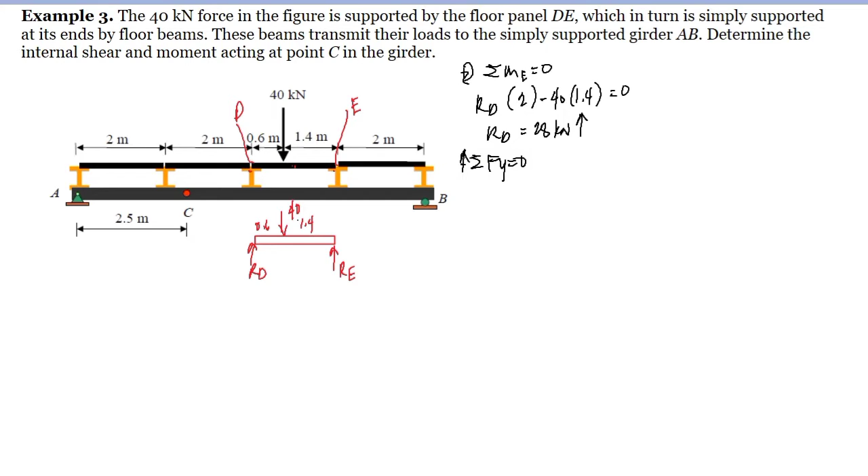Shift, solve, equals, and that would give us 28 kilonewton. So we have here 28 kilonewton. The answer is positive, so tama yung assumption natin that RD is directed upward. Summation of forces vertical is equal to 0, taking the upward direction as positive. So we have here RD plus RE minus 40 is equal to 0.

But we already had computed the value of RD. So that's 28 plus RE minus 40 is equal to 0. So solving for the value of RE, 28 plus RE, so that's X, minus 40 is equal to 0. Shift, solve, equals, and that would give us 12 kilonewton. And it is directed upward since positive lumabas. Tama yung assumption natin.

Okay, so since RD here is equal to 28 kilonewton and RE here is equal to 12 kilonewton, this reaction will be transmitted to the beam. So kung ito yung beam natin, this 28 kilonewton will be transmitted here, and in here sa beam at point E, siya naman yung magre-receive ng 12 kilonewton load from the reaction RE. And of course here, it will be reacted by 28 kilonewton and 12 kilonewton here.

So para dito sa girder natin, review, ano pinagkaiba ng beam sa girder? The girder is also a beam, but if the beam carries other beams, ang tawag na sa kanya is girder. So this 28 kilonewton here will be transmitted here, and that 12 kilonewton will be transmitted here. Now, if we are asked to find the reaction at point C here, and at point A, of course, we have the reactions here since we have a hinge support. So that's AY and AX. Since wala naman tayong horizontal na mga forces, this AX is equal to 0.

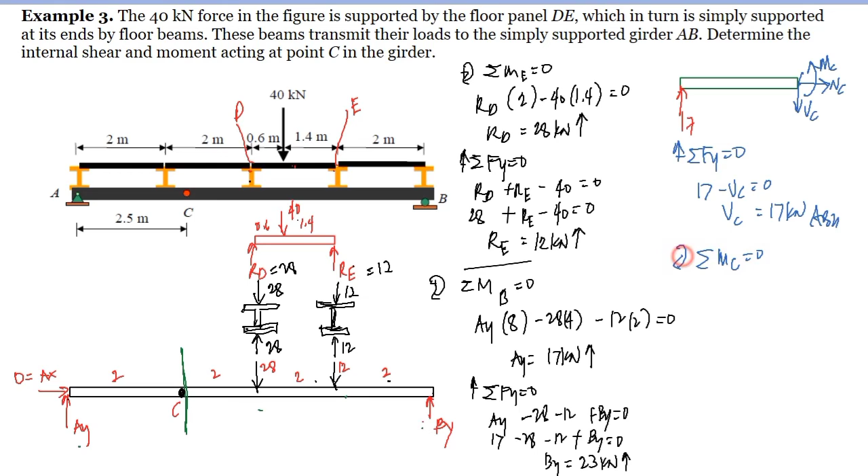Then we have here 17 multiplied with the moment arm. So as you can see here, the C is 2.5 meters from the left support. So it's 2.5 meters here. So meaning this is 2.5 meters. And the moment at C here is counterclockwise. So that is minus MC is equal to 0.

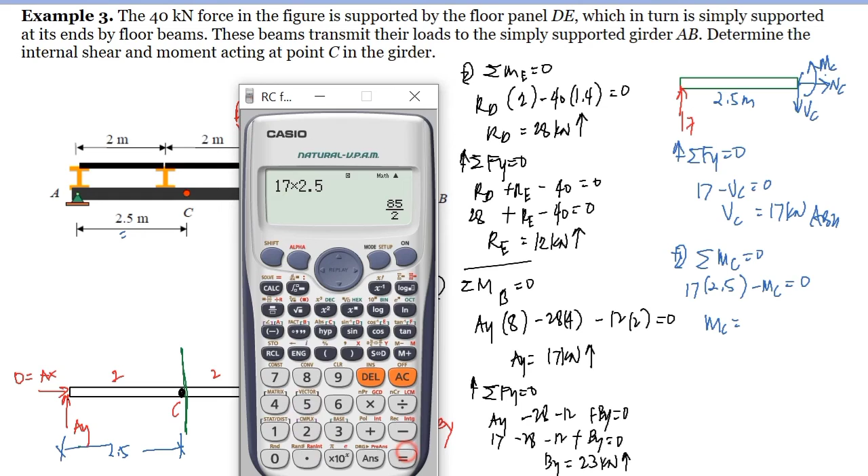Computing for the value of the moment at C, then we have 17 times 2.5. And that is equal to 42.5. So 42.5 kilonewton meter. And this is our answer.

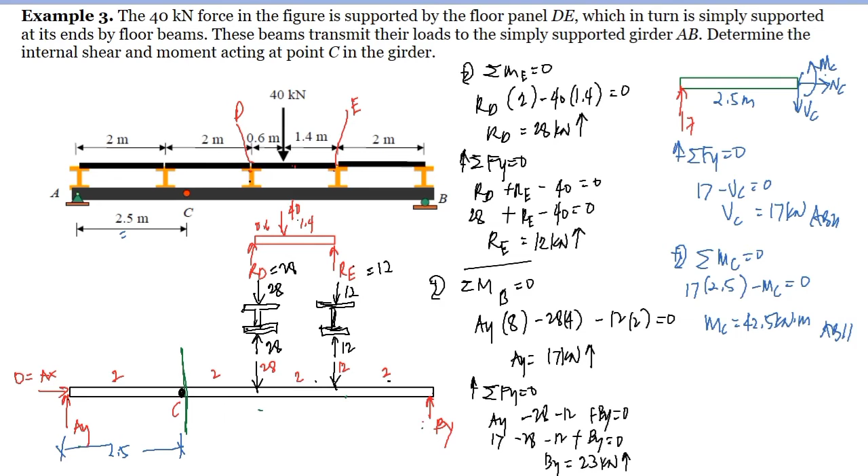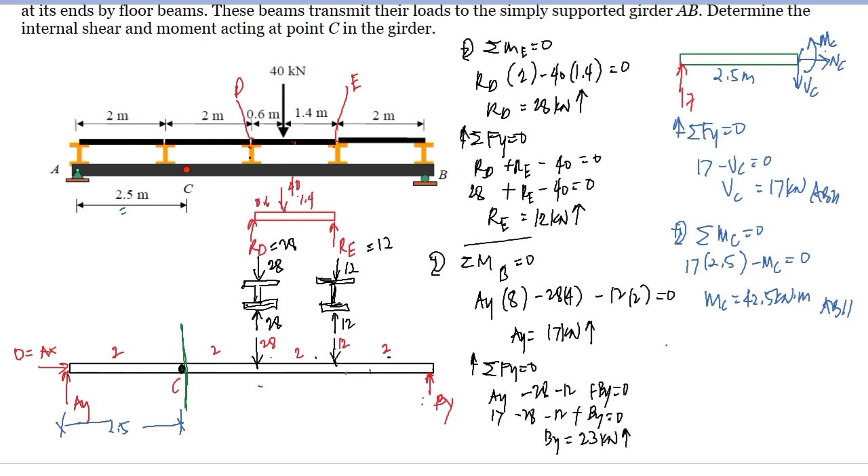So kung gusto nyong i-try yung right portion ng beam, makikita natin dito that we have the 28, the 12, and the BY. And of course, in here, we have the internal loads. So, kung ikakat natin siya dito, then ma-expose yung internal loads. So, dito we have the 28 kilonewton. Distance here is 2. This is 12, and the distance here is 2, and the BY here, as computed, that is 23 kilonewton.

So, if this is 2.5, this is 1.5 here. And for the internal loads, we have to the left NC, we have upward VC, and we have clockwise MC. So summation of forces vertical is equal to 0, taking the upward direction as positive. Then we have VC, positive, minus 28 minus 12 plus 23 is equal to 0.

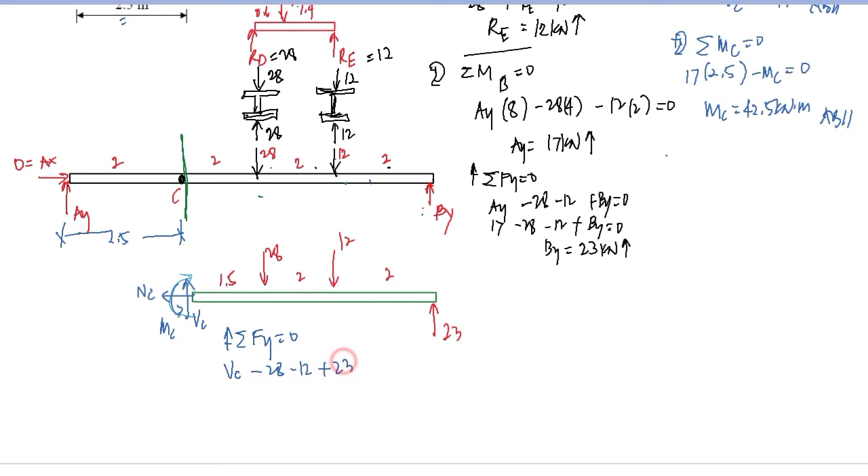So solving for the value of the shear at C, then we have here x minus 28 minus 12 plus 23 is equal to 0. Shift solve equals, then we have here 17. So 17 kilonewton, and this is our answer, which is also the same dun sa previous na computation natin.

Now, summation of moment at C is equal to 0, taking the clockwise direction as positive. Sorry, the moment here should be clockwise. So we have here the moment at C is clockwise, so that's positive. And this 28 here will create a clockwise rotation, so that's 28 times 1.5 plus this 12 times 3.5, and this would create a counterclockwise rotation, so minus 23, and the distance here is 5.5. This is equal to 0.

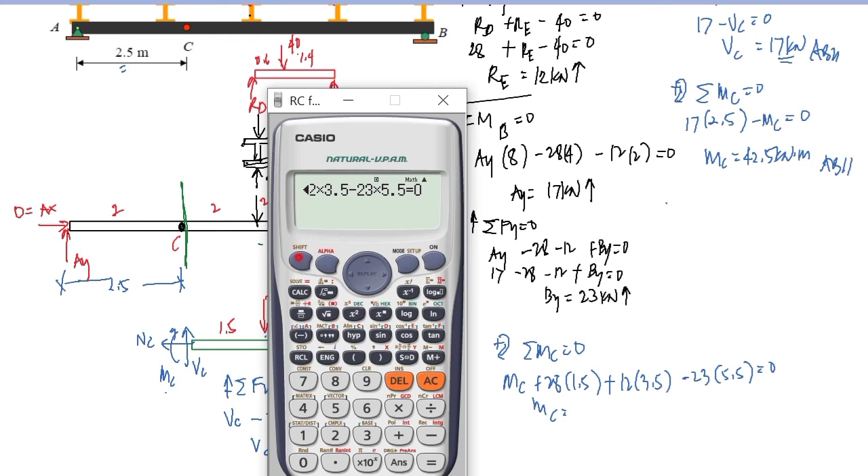So solving for the value of MC, that would give us MC plus 28 times 1.5 plus 12 times 3.5 minus 23 times 5.5 is equal to 0. Shift solve equals, and that will give us 42.5 kilonewton meter, which is the same with

our previous answer. So it's up to you kung paano siya isosolve, either sa left portion ng girder or in the right portion of the girder, pero pareho lang naman yung sagot nito.